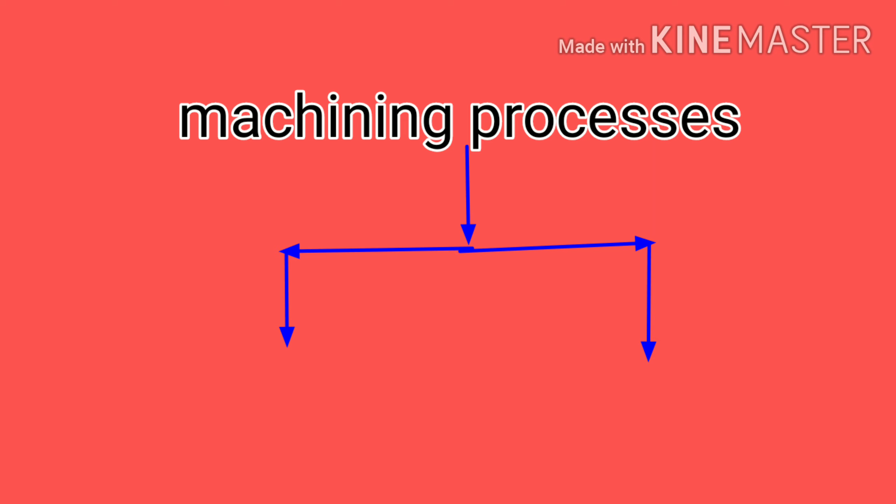Hi friends, today's topic is electro discharge machining process, EDM machining process. There are generally two types of machining processes: traditional and non-traditional. Non-traditional machining processes are used where high accuracy or high precision is required. EDM machining is one of the non-traditional machining processes.

Let's discuss the EDM machining process. It is generally divided into three systems: first, the electrical system; second, the fluid system; and third, the actual machining system.

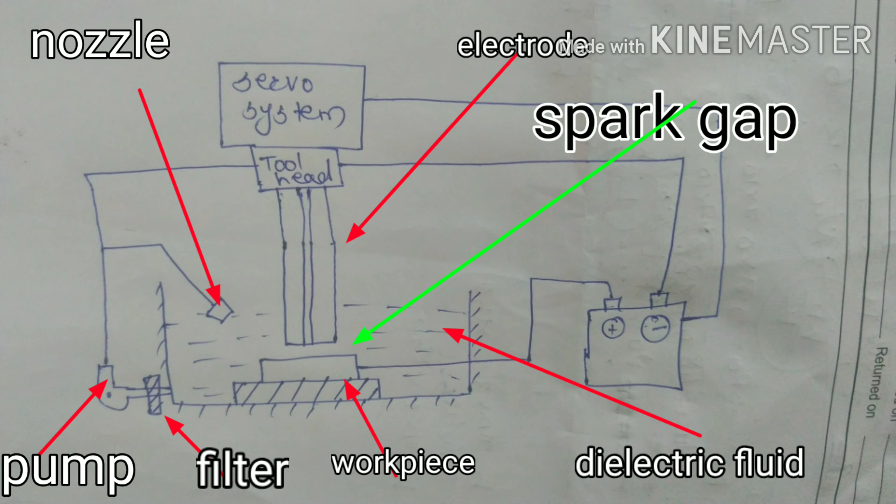First is the electrical system. It supplies electricity to the tool, workpiece, and servo system. The positive supply is given to the workpiece and negative supply is given to the electrode of the machining, and electric supply is also given to the servo mechanism. The work of the servo mechanism is to maintain a constant spark gap between the electrode and workpiece, which is very important.

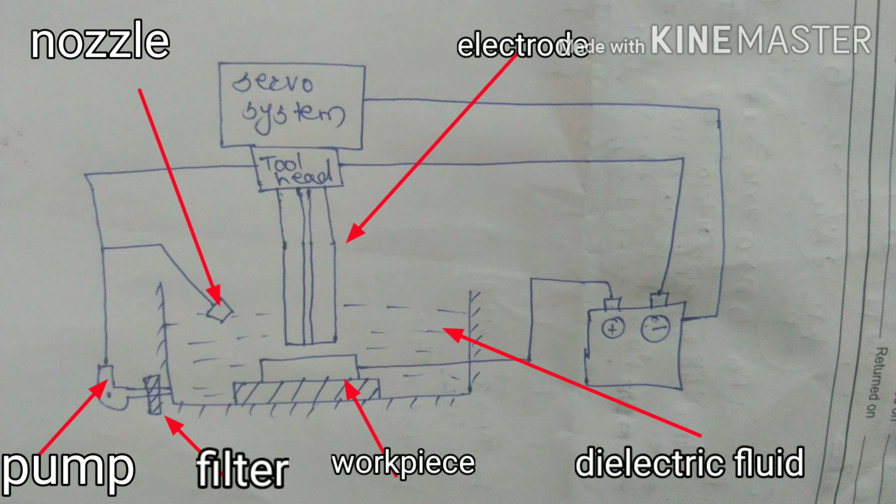If the spark gap increases, the material removal rate (MRR) suddenly decreases. If the spark gap is reduced, MRR also decreases. Hence maintaining a constant spark gap is a very important function, done by the servo mechanism using various sensors like proximity sensors, etc.

Second is the flushing system or fluid system. Its function is to continuously introduce the dielectric fluid between the electrode and workpiece. This is done by an external nozzle or by providing an internal bore into the electrode.

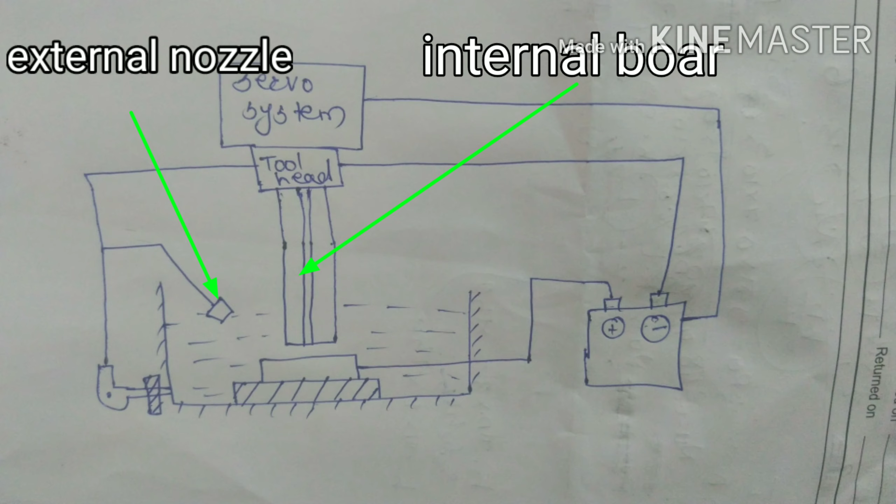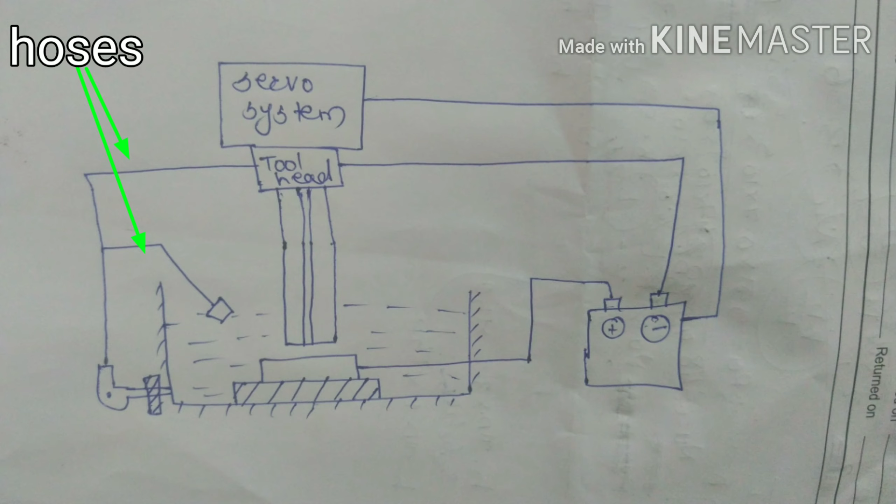The first component of the flushing system is the filter, which removes small debris or contaminants from the dielectric fluid. Second component is the hydraulic pump, which provides pressurized fluid into the system. Third component is hoses, which carry the dielectric fluid from pump to nozzle. The last component is the nozzle, which introduces continuous dielectric fluid into the spark.

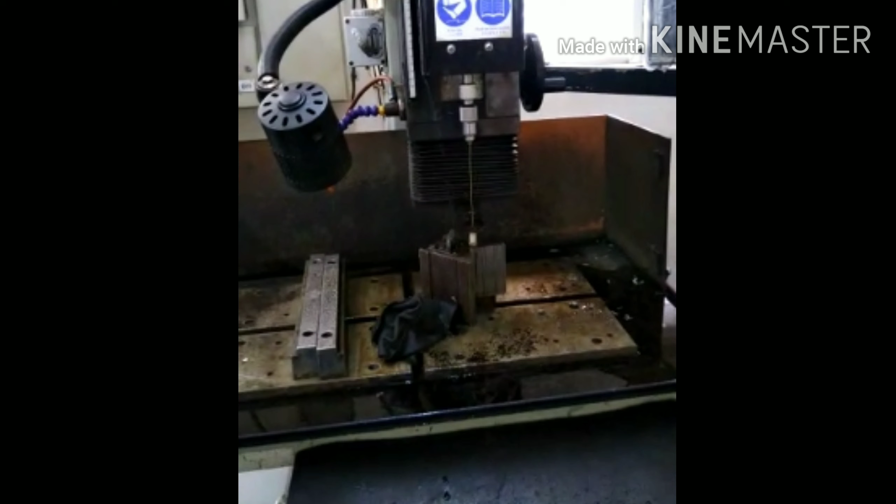Our last system is the working system, in which the actual machining of the object is done. Now let's discuss the working of the EDM machining process. First, the workpiece is fixed on the table.

The movement of the table is provided by lead screws, which provide X and Y movement only. The Z movement is given only to the tool by the servo mechanism.

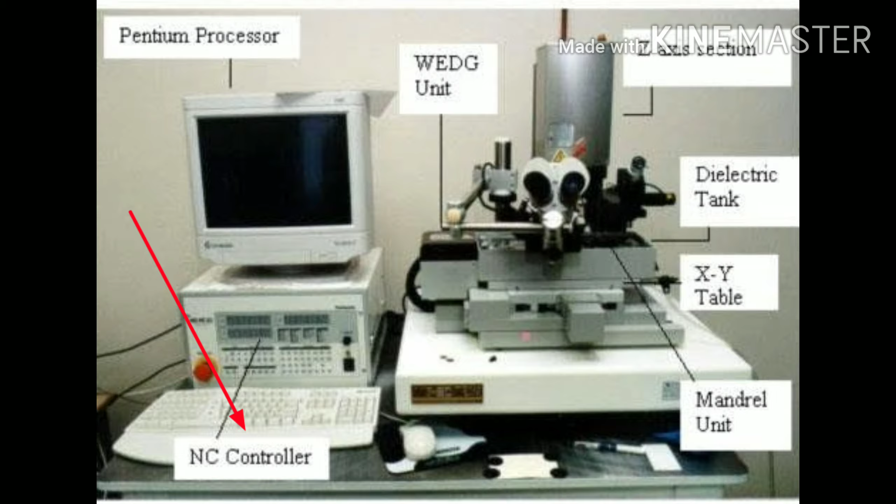After placing the workpiece, dielectric fluid is filled in the container such that part of the electrode and the workpiece is covered with dielectric fluid. After that, the correct position of the electrode is fixed with the help of moving the table in the X and Y direction. The dielectric fluid is a fluid which does not allow electrical current to pass through it.

There are lots of dielectric fluids available, and we use them according to the application. In some applications, compressed air is also used as a dielectric fluid, or in some places water is used because it is economical, easy, and environment friendly. For high quality or high precision work, sometimes kerosene is also used as a dielectric fluid.

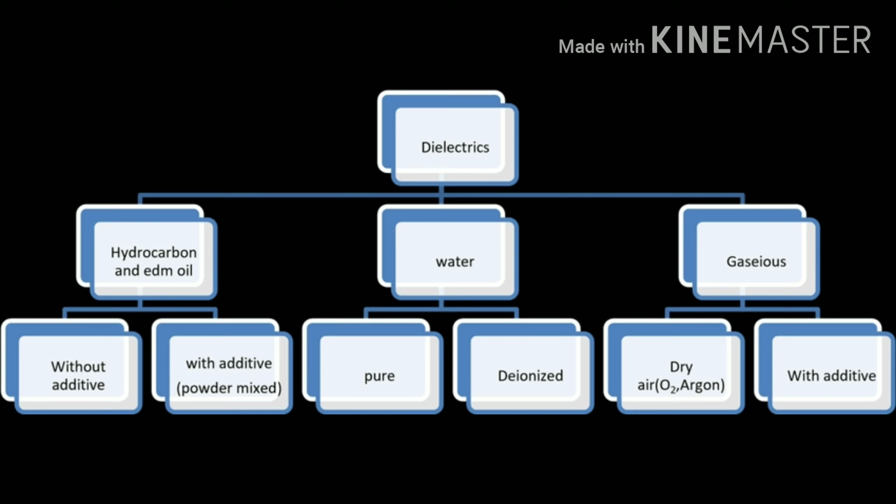The dielectric fluid has some dielectric strength. Dielectric strength means that if we supply electrical voltage above this strength, the dielectric fluid acts as an electric conductor, allowing electric current to pass through it.

When we switch on the current, it is pulsating current, because in electric discharge machining not continuous DC current is given, it is pulsating. Pulsating current has some duty cycle. Duty cycle means the ratio of T-on to T-total — meaning how long the DC current stays on. That's the duty cycle.

The pulsating DC current is given to the electrode to provide some off time. The flushing system provides fresh dielectric fluid between the spark gap, so debris produced in this gap is flushed away.

Then when we switch on the pulsating DC current, firstly the dielectric fluid does not allow current to flow through it, because it has its own strength.

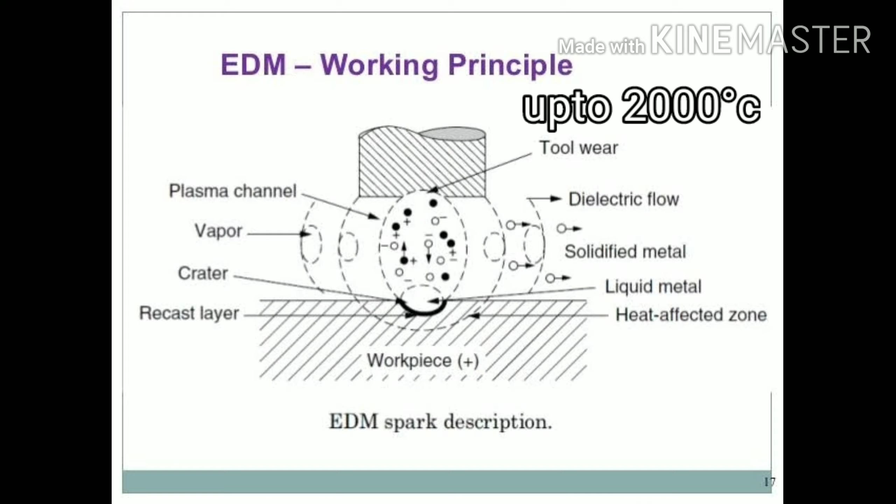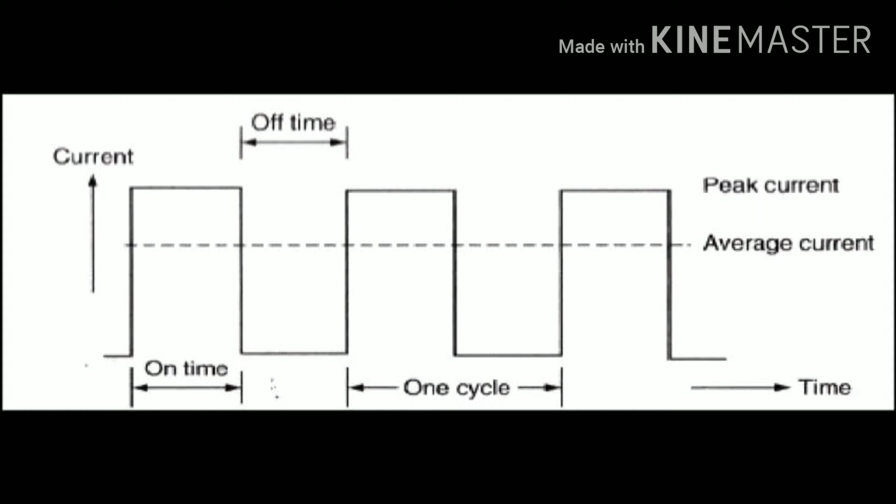In T-off time of the duty cycle, the electric supply vanishes again. At that time, the nozzle again sprays fresh dielectric fluid between the electrode and workpiece. Hence the ionized fluid gets flushed, and new unionized dielectric fluid comes into the electrode-workpiece gap.

At the same time during machining, due to high temperature, some dielectric fluid or metal gets vaporized, and this forms bubbles. When these bubbles come into a region of high pressure, they collapse, and due to this, some metal parts also get removed due to erosion. In such a way, the EDM electric discharge machining system works.

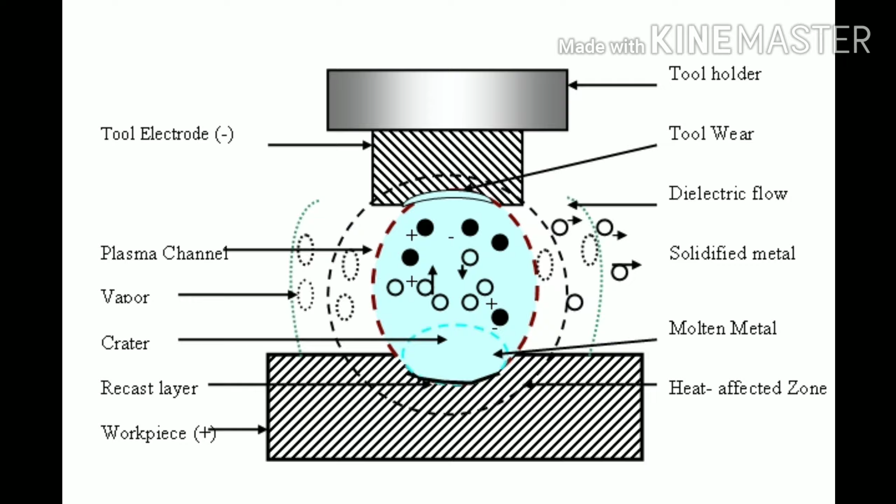Now let's see the advantages of electric discharge machining. The first advantage is where the slenderness ratio is very high, meaning the length to diameter ratio. Slenderness ratio very high means the length of the hole is very high or the diameter is very short.

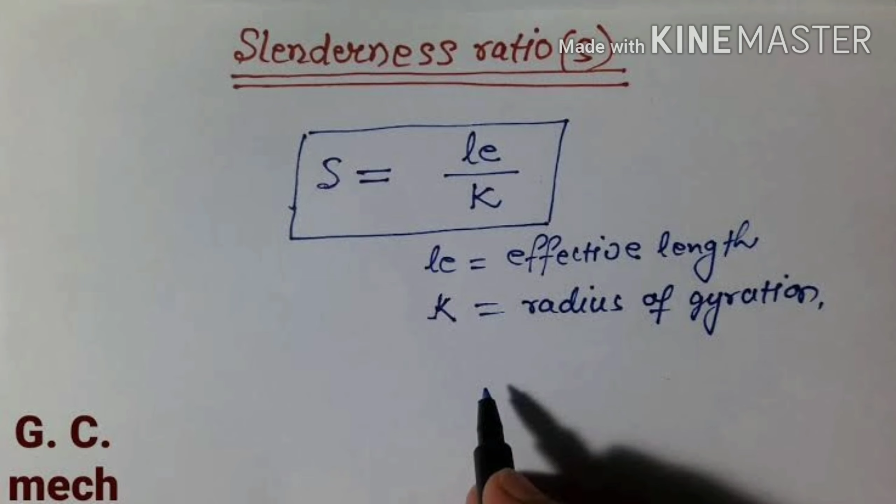In such a case, we are not able to use drill bits. In that case, we use the electric discharge machining process.

The second advantage of the EDM machine is that the precision level is very high, and at the same time, the surface finish obtained by EDM machine is very high.

The disadvantage of electric discharge machining is that we cannot use this machine with non-metallic materials or non-conductive materials.

Again, the second disadvantage is that the system is very bulky, and its cost of installation is also very high.

In some cases, dielectric fluids are also poisonous, which may harm the operator. But by use of water or compressed air, this disadvantage is converted into an advantage.

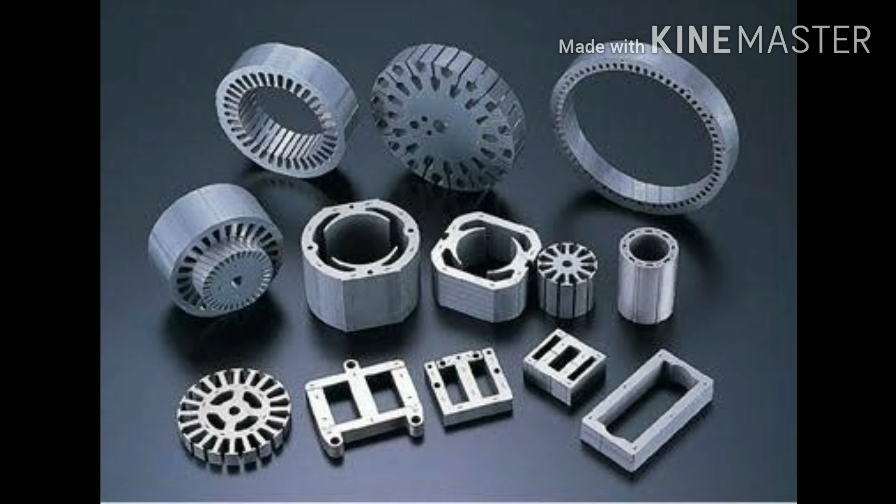The applications of electric discharge machining process are that they are used for manufacturing gaskets, for manufacturing progressive dies, for manufacturing special profiles, and for making high precision profiles in tools, etc.